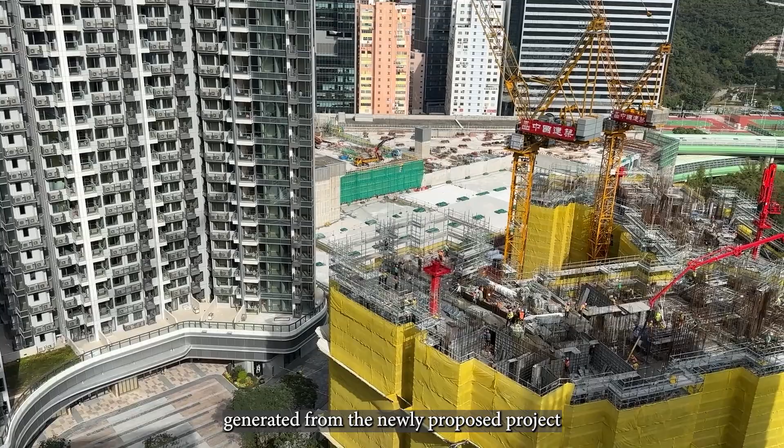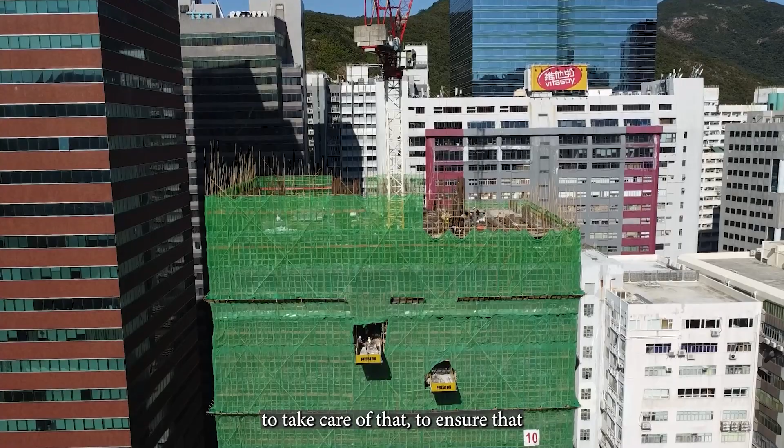The other aspect is the environmental impact from the project to the surrounding environment. Like if there's lots of wastewater generated from the newly proposed project which exceeds the capacity of the sewage system in the surrounding area, we need to propose and design sewage treatment options to take care of that, to ensure it won't cause an adverse wastewater pollution problem to the surrounding area.

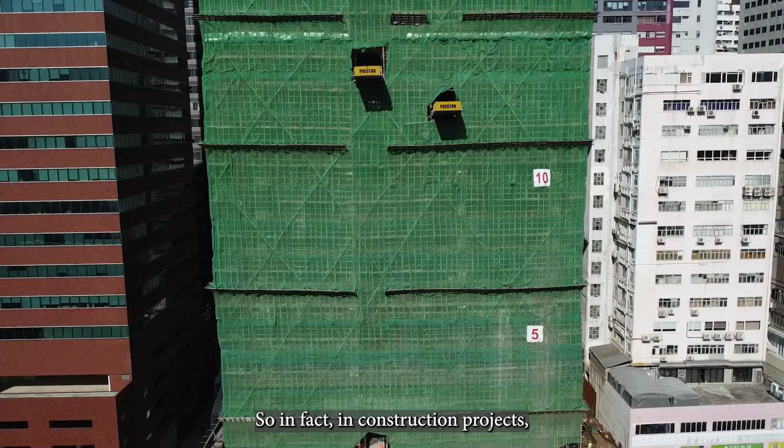So in construction projects, we always first look after environmental compliance with different regulations, and apply for different kinds of environmental approvals required by regulation, like the environmental permit for a designated project that needs to be applied for before the construction and operation of the project.

Another thing is we would be involved in environmental planning and design of the project to improve its overall environmental performance.

The first one that comes to my mind is a rather old project in Hong Kong. It's one of the projects where we installed noise enclosures and noise barriers alongside rail lines. If you ride the MTR from Kowloon to Tai Po and Fanling before Sheung Shui, you'll see different types of noise semi-enclosures and noise barriers alongside the rail line, and that's what we built in that project.

It's so interesting because at that time we needed to design and build this kind of noise mitigation measure along a live rail line. That means we only had a few hours to work when the railway was closed, around 2 to 6 early in the morning.

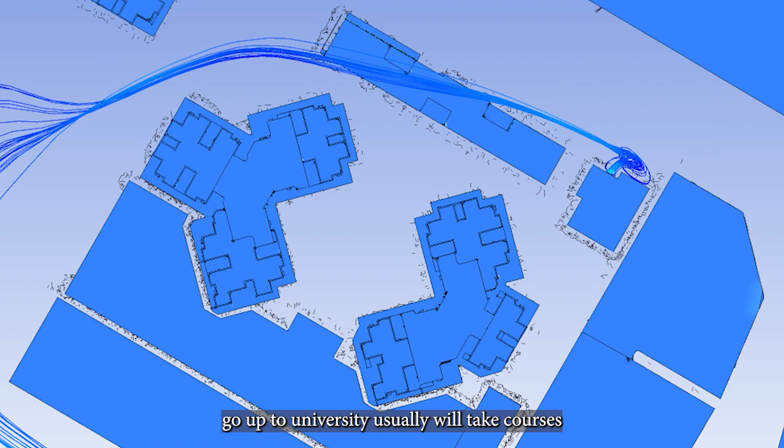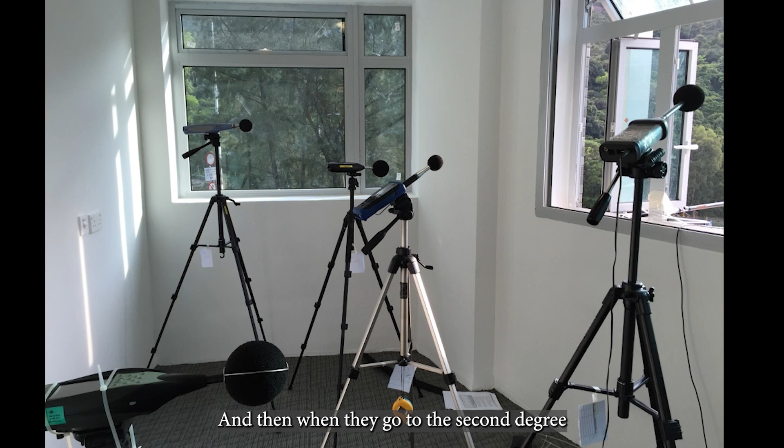I think if they're in high school, they could first build a good foundation in science, mathematics, and physics, the science subjects, because when they go to university they'll usually take courses like environmental engineering, environmental science, or environmental management in the first degree. Then for the second degree, they'll choose a more specialized subject like air pollution control, acoustics, or ecology. These are the usual subjects that environmental engineers or scientists take in college. But now, because the environmental field is very wide and involves a much bigger scope, there are more subjects they could choose if they want to join the environmental field.

As a university graduate, if they join this industry, what is their career path, and what professional qualifications can they obtain?

As a university graduate, firstly after they join the working environment, they need to acquire more practical experience in projects. A lot of the time they would start with more technical work like modeling support, on-site surveys, or measurements in the first few years.

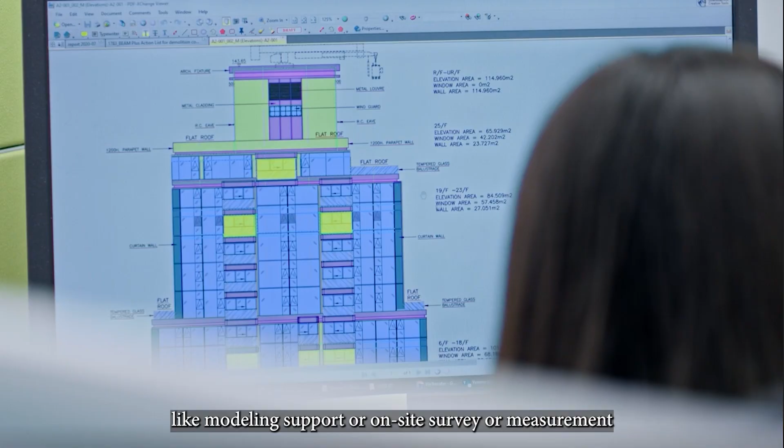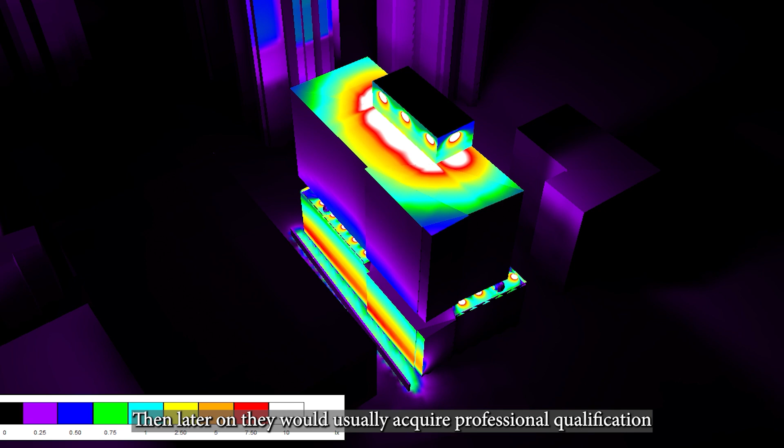Then they would need to be involved in more in-depth environmental studies, maybe some strategic environmental assessment and environmental design for projects. Later on they would usually acquire professional qualifications like chartered environmental engineer, or Hong Kong Institute of Qualified Environmental Professionals, which is also a widely accepted qualification in Hong Kong. Besides that, some professionals would also acquire postgraduate certificates in specialized subjects like certified air modeling, certified noise modeling, or ecologist, etc.

If a high school student wants to join this industry, what should they prepare in advance, or what kind of personality should they have?

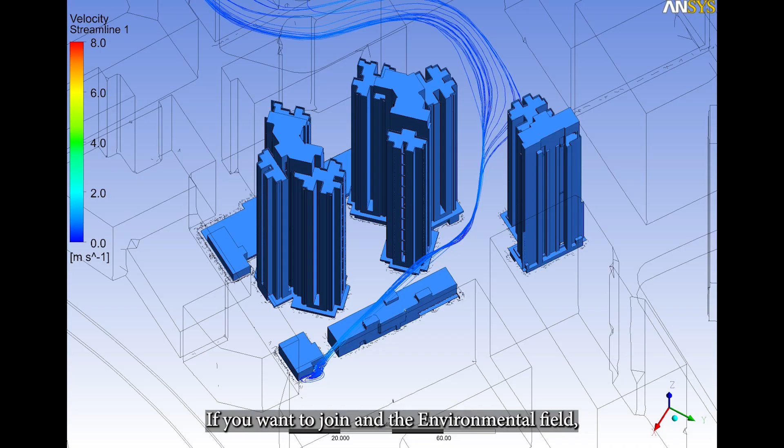I think you need to have a scientific mindset if you want to join the environmental field, because we do lots of investigation, inspection, and prediction of environmental impacts in our work. So you need to have a mind of inquiry, and we always follow the scientific way and the data in our work. That's the first thing.

And the second thing is, because the scope and areas in the environmental field are very wide and keep expanding, you need to have a growth mindset so we keep learning all those evolving requirements and standards, and keep updating ourselves. Like myself, I take many different trainings in a year, and even a few new certification tests every year, so that I make sure I keep myself updated to the latest requirements.

And also, I think another very good character to have is really the love for nature, and passion to contribute to sustainable development. So if you have a heart to preserve our planet for our future generation, this is the right subject for you, and it will be the right field for you to develop your career.